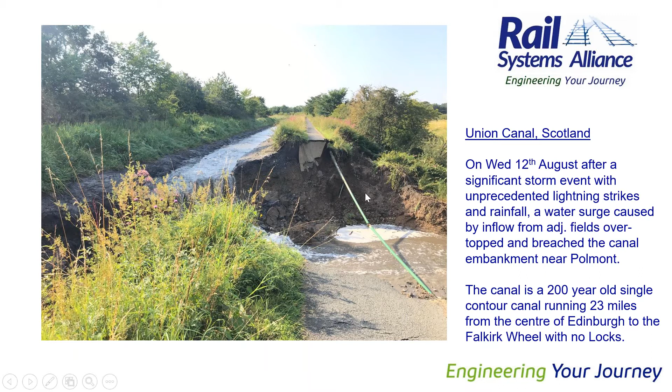Lightning strikes in the Polmont and Whitecross area were significant. Several properties were hit, and there was a significant amount of rain, something like 80 millimeters over 4 or 5 hours, which was subsequently advised to be, I believe, a 1 in 240-year storm, which is obviously a fair return period. The impact it had on the Union Canal was quite drastic, and I'll let, hopefully, Scottish Canals' Director of Infrastructure explain that for us.

Good afternoon. We've had a really challenging day here in Linlithgow. Overnight we saw an incredible amount of rain, up to about 40 millimetres in an hour, hitting this area of the Union Canal. And unfortunately we have seen a breach reported to us about 8 o'clock in the morning, and we were out here within 45 minutes to have a look at it and see what we can do.

We've taken actions across the canal. We've put sandbags at either end of this area of the breach, and we've managed to stop the flow. We are making significant progress, but this is a very challenging situation. The water that is flowing out of here is heading down across a number of fields and down onto the Edinburgh-Glasgow railway, where there is significant damage.

So this has very much been a partnership approach between Transport Scotland, Scottish Canals, Network Rail and the police, and we are dealing with this issue. But I have to say the team have been absolutely fantastic out here, working with our team Mackenzie's. We're getting on top of this situation, but it is going to take us time to get it repaired. It's probably looking at least 3 to 4 months and a considerable amount of investment.

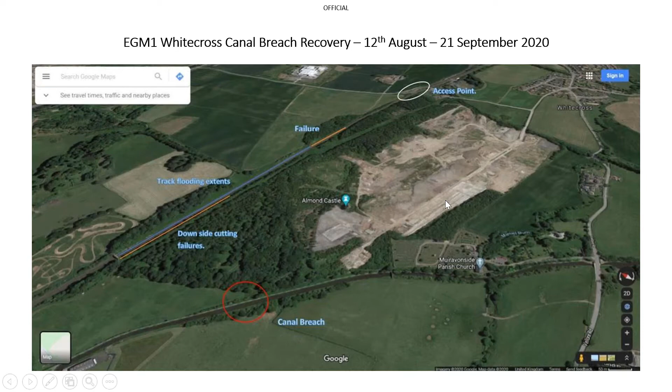So you can see the old brickworks area, which is pretty semi-derelict currently. And then a wooded area which runs between the breach point, heading north down to the main Edinburgh-Glasgow line. And you can see marked on there the kind of extent of the flooding. This is the kind of scale of what happened.

So the canal breach, there was literally thousands of gallons of water swamped into that area I showed, in through the woods that you can see in the back of the photograph, and then there was a sort of berm arrangement and an undulating topography running adjacent to the railway cutting, and as it crossed that, it brought material and significant earth into the railway cutting, along with the massive volume of water. And you can see the impact it had.

As I was talking about with the canal, it basically filled up the railway cutting in that section, which is almost 1 kilometre long, and looked for the weak spot at the end where the cutting changes onto an embankment slope and eroded away from there. So we ended up with a 300-metre long washout, from that transition point.

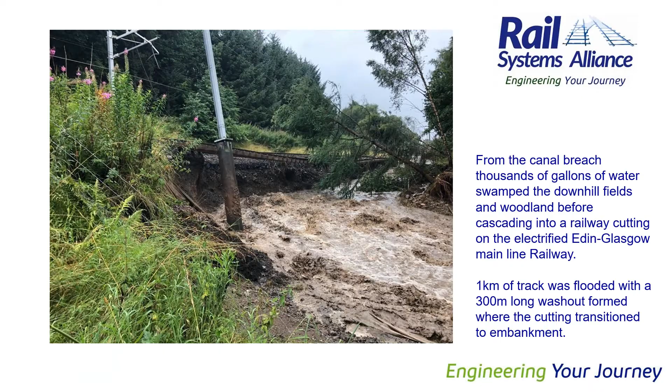So looking at the site, slightly more zoomed in, you've got the sort of triangular wooded area, which reached the main cutting, which basically starts from the main A801 road bridge, which is the Lathallan roundabout to Bathgate road bridge, for those that know the area. And the cutting runs from there for the best part of a kilometre before it goes on to an embankment section on the approach to Bo'ness Junction. And you just see Overbridge 50 there at the bottom of the slide.

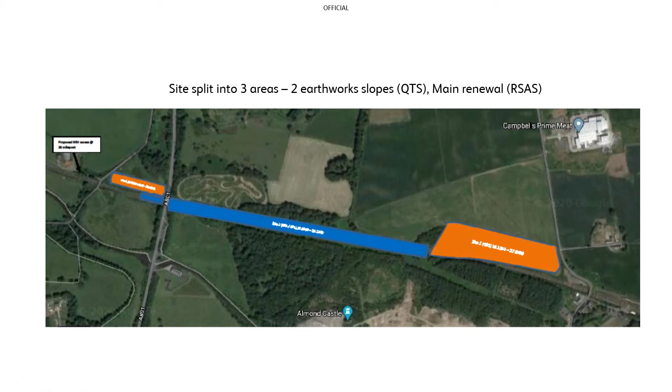Again, some photographs. One of the odd, shall we say, opportunities on site is that you can see these poles. So there was actually some trial slope monitoring systems installed on this particular section of the Edinburgh-Glasgow main line. They didn't actually particularly trigger because the water basically washed across the top of it rather than coming through or undermining those slopes, which had previously been recognised as being fairly mediocre slopes, I guess would be the term.

But that monitoring system has a webcam facility, which is where we had the opportunity to get these photographs. So you can see in the top left photograph, the water coming along and basically had started pouring out in the first photograph into the deep, almost 9 metres high hole that it created, and was gradually working its way back westwards along the edge of the interface between the railway embankment in the distance and the railway cutting where this picture is taken from.

At the other end, this is the other monitoring site. You can just see an accommodation bridge, possibly just cut off in the photograph there, and the level of water. These photographs were taken by mid-afternoon, I think. And you can see the volume of water was obviously significantly less. Once the plug hole had formed at the far end, at the east end of the railway cutting, the water was charging out from the railway, but had caused significant damage on its way.

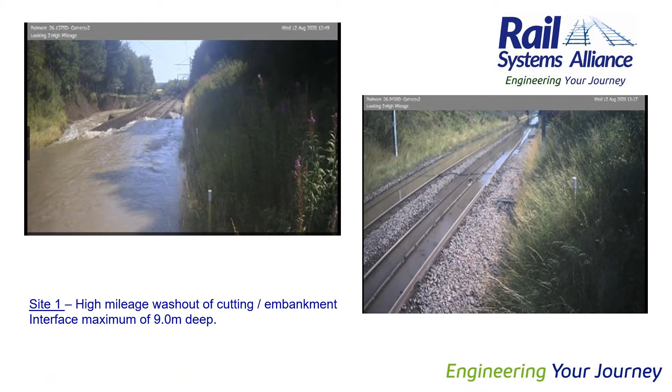The inflow came in over the downline cutting from the adjacent woodland, flooded the area and brought pockets of material primarily onto the downline. The pockets were formed, I think, because of the kind of lateral undulations in the slope along the downline to the south of the tracks.

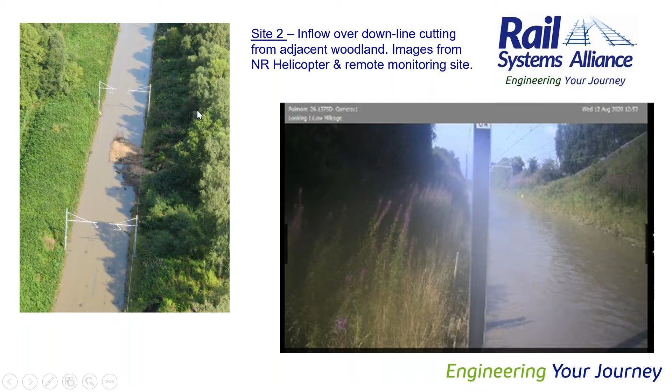A couple more photographs of that, just the kind of material that came in, and demonstration that people were activated, while obviously the canal people spoke about being notified at 8 o'clock in the morning. I think the original notification to Network Rail was somewhere near 5:20 in the morning, when the first train coming through for the start of service notified water coming in and becoming above rail level, which then tripped the track circuits and eventually tripped the overhead line, as you'll see the reason for that shortly.

Looking at the split of site, the previous slide was the centre section, so what I'll refer to as Site 2. The next section is Site 3, so that's along at the main Bathgate Road Bridge, just at the bottom of the slide here. You can see the track photographed from our helicopter, and you can see where the water ingress has eaten itself in underneath the downline. So you can see the exposed sleepers there. And similarly, round about the overhead line masts. So that became another design issue that would need to be picked up.

So moving into a summary at that point, I became allocated and involved in the washout by about late afternoon, 1600 on the 12th. Attended site to meet some of the asset team and representatives from the geotechnical contractor, QTS. They'd been on site, had a look, and they were probably saying they were going to go away and start making arrangements. But definitely when I arrived, they recommended going and having a first-hand look, and just the scale of what had occurred and the sort of wipeout of the railway cutting was quite incredible.

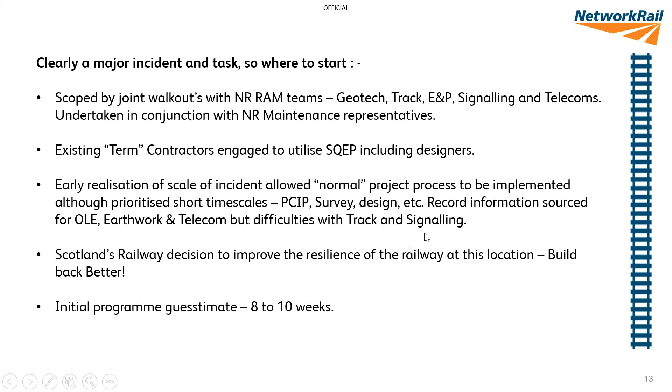So we looked at it and we thought, right, we really need to formalise things, use the correct process, consider what we needed to get in place, safety piece it, get some design information, get the records, make sure that we knew what we were dealing with and properly come together a plan to reinstate. Backed up by that, there was a corporate decision, a Scotland's Railway decision to improve the resilience. Build back better was the phrase that came out and continues to be considered in many ways at the moment. Initial programme guesstimate, 8 to 10 weeks was where we started thinking about it.

So talking about the different sites, site 1, that was the main failure point. This is a helicopter shot looking towards the west. So you can see the water sitting up the top there in the railway cutting. It then came down off the side of the downline and created its own ditch and its own route out of the railway cutting and down the embankment slope, eating in to, as I said before, about 9-metre depth in this area here. So that was termed as being the main slip site, site number 1, and it was 300 or so yards long in real work terms.

QTS were engaged and activated to manage that area. They did a great job setting up site, dealing with all the various apparatus and infrastructure and landowner access. These sites always have farmers that are looking for every penny they can achieve. So the reconstruction work ended up using somewhere on the order of 9,000 tonnes, a combination of 6B rock and 6F5 granular fill material to recreate the embankment itself, and obviously the formation and subbase to the new tracks.

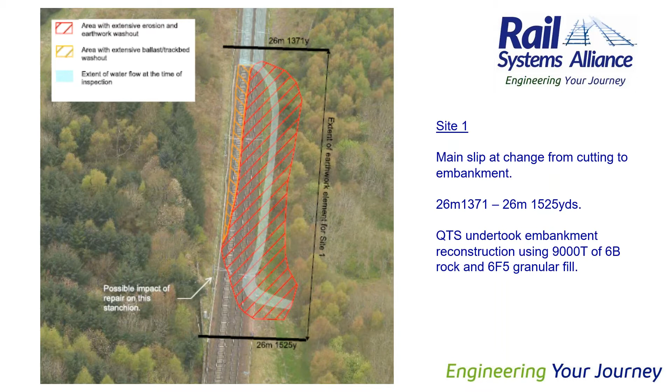This was the detail. COWI are the designers who are on the framework with QTS. So they attended site pretty much round the clock for the initial period and produced recommendations, obviously to do the clearance work initially, get down to a robust material, and then to work with the fill material back up. So you can see the difference in material shown there. That's the 6B rock fill at the bottom, and then the 6F5, and the separation, eventually, on the deepest part of the washout, was between the up and the down roads.

Obviously one of the big concerns is any kind of settlement acting across the sticks, so we did try to put a benching detail in there, but with having drainage and service routes balanced fairly precariously along the edge there, they had to be fairly short. So that certainly was something of an issue later on when we considered reopening and TSR speeds.

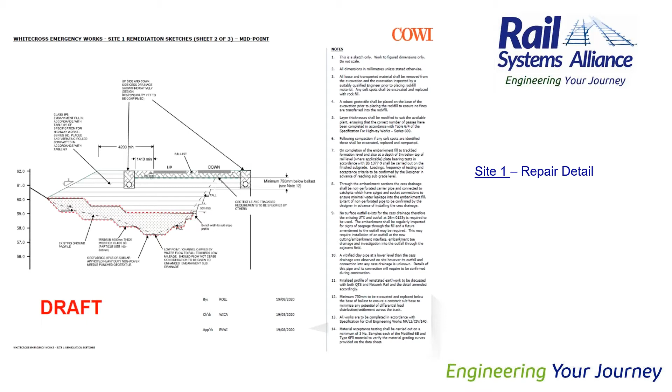At the other end of the works, beyond the Bathgate Road, obviously the scale of work there was significantly less. There was an overhead line mast, which is unfortunately just behind this photograph, which needed to be investigated and then filled round about to create support. And then the embankment was more traditionally benched at roughly 45 degrees to come outside the track support zone. And again, a rock drainage layer was put into the very wet area in the bottom of the adjacent field, and allowed the embankment to be built back strongly enough to support the profile and the cess. As ever, overhead cables, so additional safety concerns adjacent.

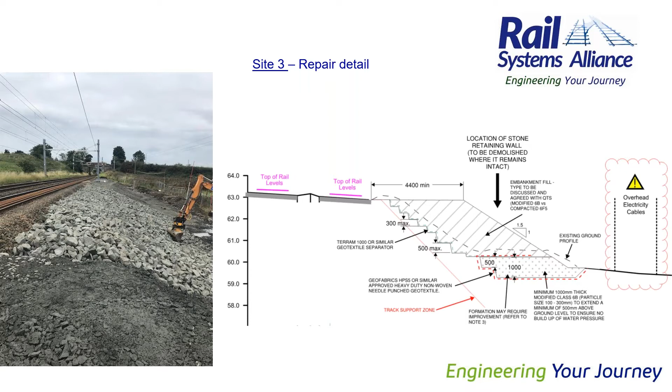So I'll probably move on now, hand over to site 2, which is the centre kilometre or so of the work site, and the main railway reinstatement, which Martin will run us through. Okay, next slide. Here we go.

Yep. So the Rail Systems Alliance got involved quite early on, but this was probably the Monday after the Wednesday that we had our first joint walkout with the asset managers to agree the specifications for the track renewal. The loss adjuster had already agreed that all the areas that had been affected by the flood were to be renewed.

So that cleared a lot of the dubiety whether we try and reuse material or whether we go and just put new material in. The track on the downline, which is on the left-hand side of the photograph, we renewed that 5 years ago along with the drainage in this area. So that was initially thought was, do we try and salvage that and reuse it? And the decision was taken that that would be taken off site and recycled back at Carlisle.

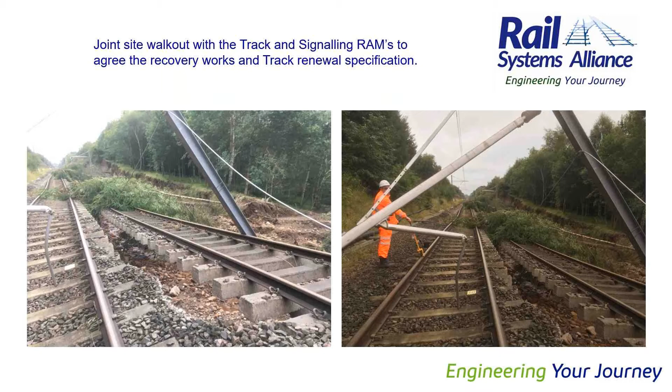Next slide. So this is the on site 1. This is the site compound being constructed. So this was the initial access point. So we had access points at site 1 and site 3, and then we set up another compound at Parliament Yard to access the sites for rail access and storage of material.

The first priority was to get on site 3, the previous photograph that was shown, some of the ballast had been washed out. So the priority was to get that infilled so we could start bringing road rail machines in by the upline, because the upline was less affected than the downline. A lot of the washout had occurred on the downline from the embankment on site 2. So that was the next priority. And then whilst all this was going on,

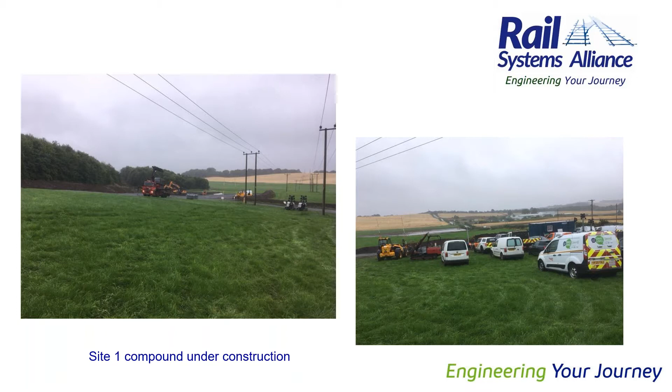you'll see in that photograph there on site 1. What we had to do there was we burnt the rail in either side of that to then allow QTS, it was SPL, to come and remove the overhead line equipment and make that safe. And then the track was chopped up into short 3-meter segments, and we had a machine in the bottom of the hole there lifting out to a road railer that you can just see at the top of the photograph. And that took that area, the 200 meters area of site 1, we stripped all the track out of there to enable QTS to then have a clear site to start doing their recovery works on.

In the meantime, while this was going on, we were surveying and getting an ASC design produced ahead of us starting to do the track recovery works, or track renewal works on site 2.

Next slide. This basically shows a little bit more of the issue we had on site 2. A lot of the embankment on the downcess had probably had previous ballast riddlings from previous reballasting jobs, I think, chucked up on the embankment there, because a lot of that stuff that washed down was sort of ash-like and looked like former ballast riddlings. So all that had to be cleared away.

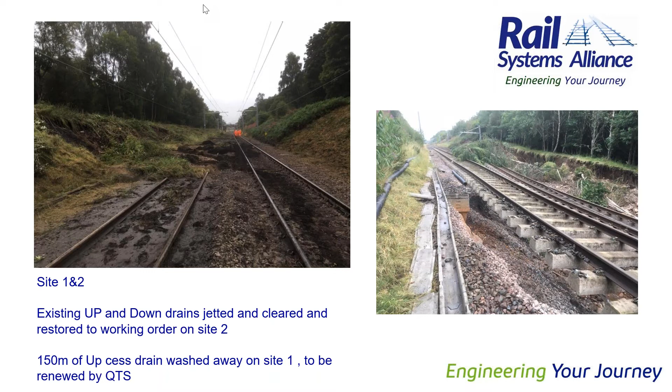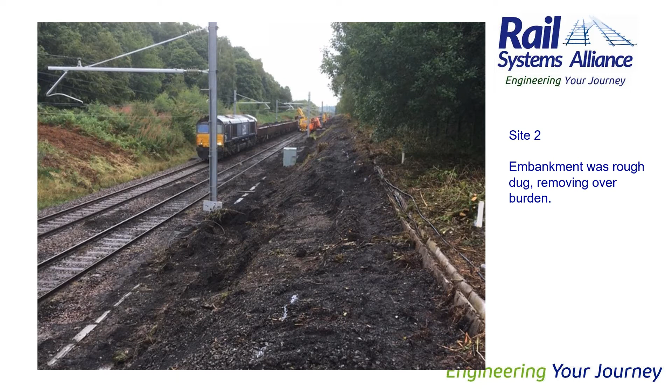So this is a little bit further on now. So the embankment's now being graded off, and we're now preparing to do the actual track renewal on the downline. So that's just mentioning the rough digging there. So that's about 4,000 tons of material was removed. Next slide.

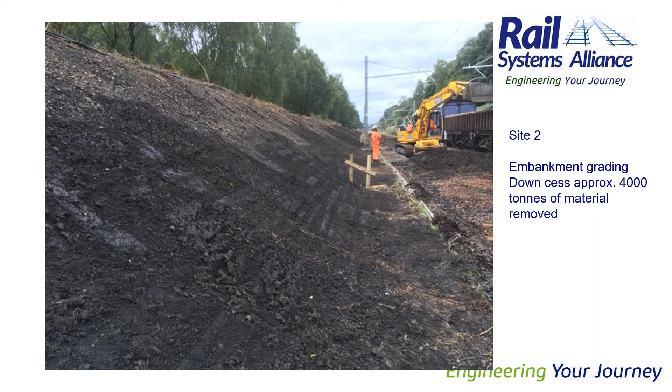So this is just looking back at site 1 again. So you can see now that the infill is going great there now. So you're probably down to about 2 meters now. So they've already put over 7 meters of material in there, and that was allowing us to continue on with the recovery of the upline then on site 2. Next slide.

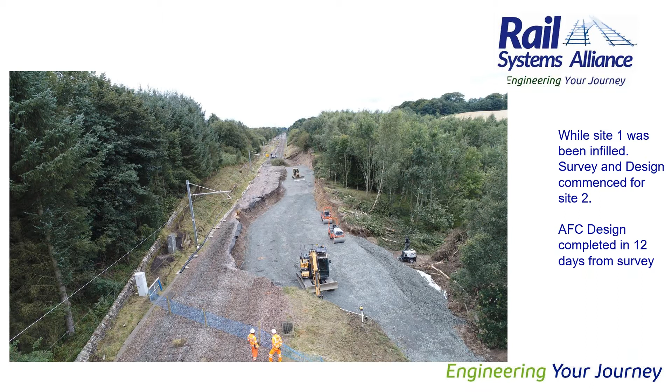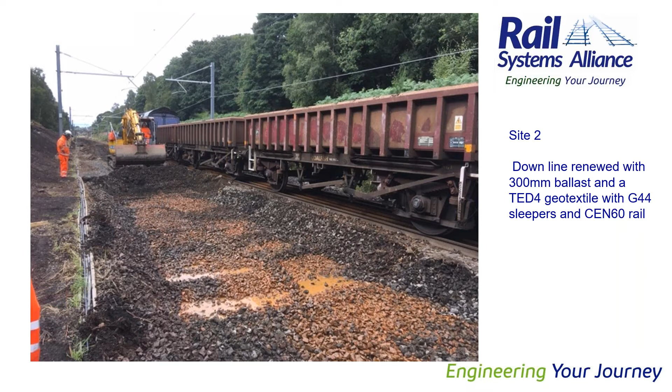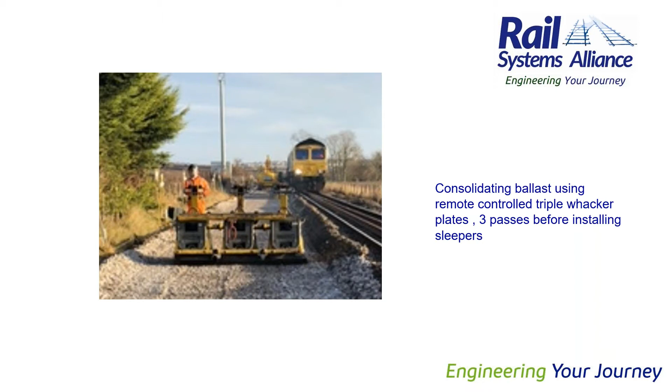So we'd agreed at the start that we were initially going to open at a 15 mile an hour handback speed. So we worked on the basis we're going to do 3 passes with the whacker plates, because there was a bit of debate whether we're going to go for a higher speed handback or not, but we'll come back to that later in the presentation. But at this early on, we had agreed that it was going to be a 15, so that's what we designed and did the consolidation for. Next slide.

This is commencing now of the relay in the sleepers. So this is using the spider handling system. So this takes out 7 sleepers at a time, and the handling tool, or spider as it's called, spaces your sleepers and drops them in position. So you can see that there's a white spray paint marker on the left-hand photograph. That's so the operator can then line up the sleepers. It places them in position for relaying. Next slide.

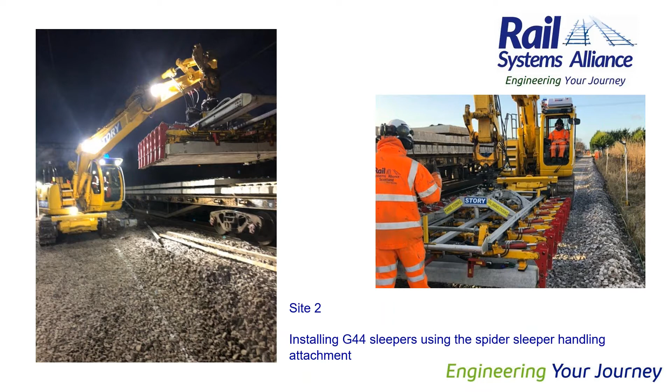So this is now looking at site 2. We're getting very close now to getting to the final formation level. We'd agreed with QTS that they were going to profile the sub base with a correct crossfall for us. So all we would have to do was relay our geotextile on it and ballast up. And they were also going to install the track drainage, but there was about 150 meters missing at that location as well. The next slide.

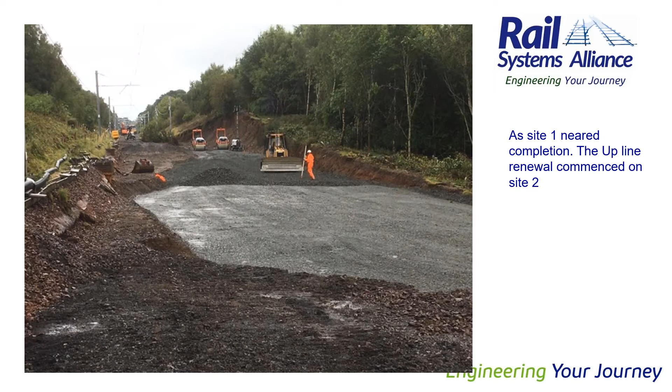So this is now the formation ready. QTS have just completed their works, and now this is just us preparing to start relaying on the downline, the upline, to try and join the 2 sections of railway together, and then we're going to relay from the downline from the upline. So the next slide.

This is a new bit of kit that we'd only just started using. This was the second time we'd used it, and the first time we'd ever used it for dropping ballast. These are the MFS wagons, sorry. It was originally bought for a high output relaying system, and as a result of the cutbacks, there was surplus wagons available. So these wagons are now available for use for normal track renewals rather than high output track renewals. And 2 of these wagons were converted into track machines.

Initially, they were designed for S&C, and the intention was that they could be used for both excavating and bringing material to site where you've taken all the track out, so you don't normally have any other means to relay from one road to the other. We used it very successfully for excavating on the site at Devil's Bridge in between Inverness and Dingwall about 2 weeks before this photograph was taken, and that was the first time we'd used them. But on that location, we were using them to load into and transfer the material into the train, rather than, in this case, we were using them to offload.

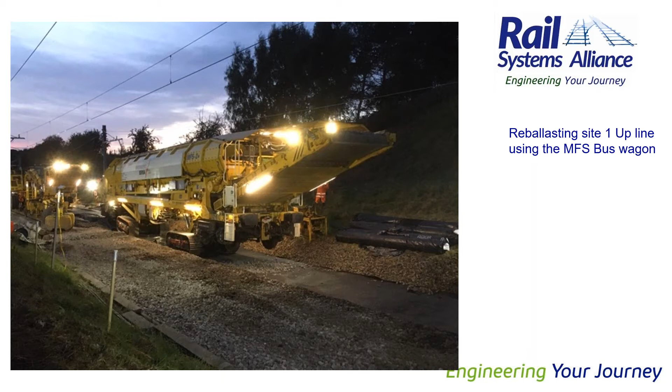Okay, Martin, just to say I've got that video ready on the next slide if you're good to go with that. Yeah, so this is the video of this machine working now. It's quite loud, so I'll probably just let you watch the video and maybe be prepared to tune your volumes down. Yeah. Assuming it works, of course.

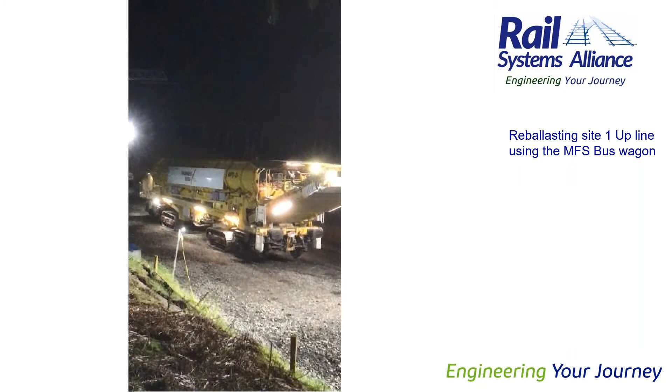Right. Yes. Okay, Martin. So, yep.

Yeah. So you see there the photographs of offloading the ballast there. Now I should say there were 2 wagons that have got tracked machines. There was one, you may have seen it in the corner of the photograph, that was just at the end of the last shot.

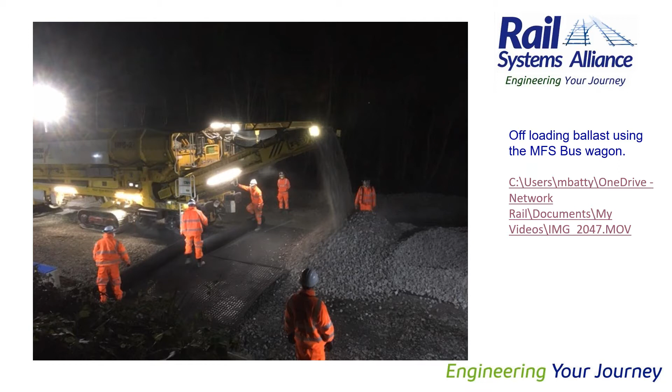Unfortunately, one of the wagons we were unable to get to work. It physically was able to move around, but we just couldn't get it to offload the ballast. It was showing a systems fault on it. Unfortunately, you'll see later on that there's another story to go with that. So I'll just go on to the next slide now.

So we had 3 separate design teams, all working under separate contracts, but everybody worked together, and it was a fantastic collaborative working, and it was a real good example of what people can do when it really matters. So we'll go on to the next slide.

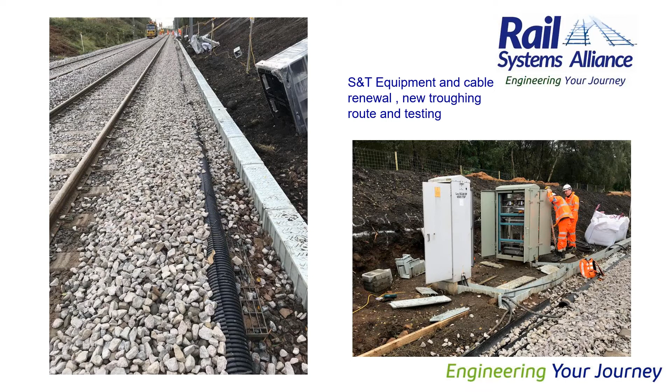As well as the track works, there was quite a significant amount of S&T work to be done, apart from just new cabling routes and new cabling. Location boxes all had to be renewed because they'd been under floodwater up to about 1 metre height. So all that equipment had to be replaced, renewed and tested prior to the work being completed. Next slide.

Okay, I think I'll step back in. Thank you very much, Martin.

At that stage, we were working to a completion date of the 28th of September. They challenged us to push ahead and see what we could do to improve that, and we were basically pushed into doing the 21st of September. The consequence of that, as you've seen from the photographs, a lot of the heavy civils had progressed well. Obviously, the track renewal had gone in, but it did cause issues with the logic that we started off on, particularly relating to the signalling equipment, about trying to build back better.

Making decisions to renew cables and renew boxes, where a normal emergency response would just be to use maintenance perspectives and put things back together as quickly as possible, was a little undermined at that stage, and it meant that there was ongoing rules of route work following the entry into service of the reinstated railway. So that was a political and a corporate decision at that point to bring things forward.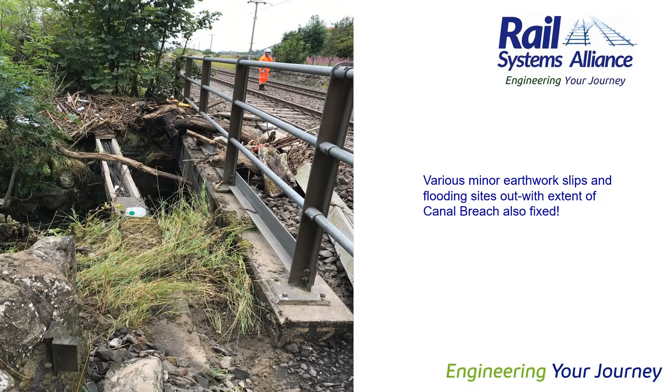So running back to a previous slide and updating it, in summary, how were the works scoped and designed, particularly addressing hazards and improving the resilience. So as I said before, joint walkouts, using the existing term contractors and the qualified and experienced people to do the works. An early realization of the scale, making sure that we carried everything out with all the right records.

As Martin talked about in one of his slides, design work was properly surveyed and fully carried out, you know, in a time scale of a few days. And I think we ended up with a signed off permanent way Form B 6 or 12 hours in advance of it actually being implemented on the ground. So, you know, things were certainly done very promptly.

Looking back, one of the key early PM decisions, I think, in consultation with our health, safety, quality and environmental team, was to split the site into 3. It gave the 2 principal contractors, QTS and the Rail Systems Alliance, the opportunity to be geographically separated. And then that allowed our CDM responsibilities to be met by those 2 principal contractors.

Building back better, the resilience, so we improved the earthwork robustness.

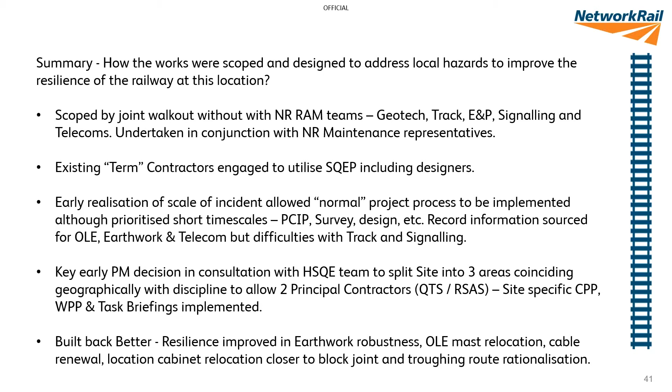Hazard management, obviously the track condition for plant access, so we had to make sure that we checked the plant on the way up from the access points, particularly from Polmont Yard. The earthwork condition underneath, making sure that we had an understanding of what damage the water may or may not have done in softening up the formation. What was going on in the adjacent ground, whether or not there was going to be more water. So we had quite a lot of liaison with Scottish Canals, making sure that their temporary dams were robust enough to control any further risk from there.

Condition of cables, obviously, as ever, telecoms cables, for example, can have an impact on station announcements or signalling systems many miles from any particular location. So we still had to treat a lot of the cables as live, even though we knew they had been disconnected locally. You do that to ensure that you avoid impacting the operational railway outwith the extents of the site.

Something came up. There was a request to run an electric service into Linlithgow from Edinburgh, while obviously the Linlithgow to Polmont section was still blocked by the works. But the feed system for the overhead line came from towards Greenhill feeder station, and it could be resupplied from over on the Bathgate branch, but that was a little more technically problematic than expected, and took up a fair bit of involvement from both Network Rail asset teams and some assistance from SPL and the Network Rail Capital Delivery project teams.

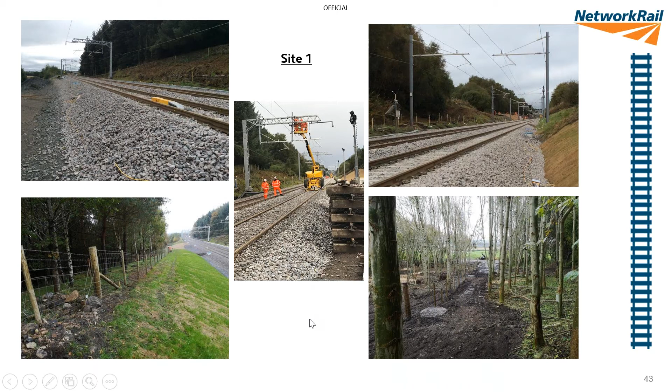Down at Site 3, you can see all that graded out and rock fill to create an embankment and replace the affected area around the overhead line mast, and new fencing, and returning the field back to the landowner. One of the things that we were looking at picking up, I think Martin mentioned it, but in the permanent way design, the overbridge that you can see in the distance was actually tight clearance, electrical clearance wise. So the design was able to achieve an additional 100 mil there, which has allowed for the removal of the tamping restriction through that particular stretch.

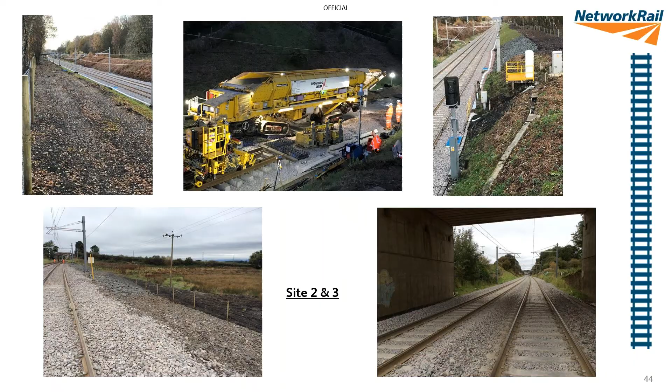I'll try my luck with a couple of videos. So we ended up with test trains on the evening of Sunday the 20th of September. As you can see in that footage, it's a little darker. And then a handback on Monday the 21st for opening of service. As Martin referred to, handback speed, we eventually agreed on 60 miles an hour. There was quite a lot of challenge to the initial figures.

The embankment designers were keen to go with 40 mile an hour initially, and obviously the Rail Systems Alliance Scotland are capable of opening back up to a much higher line speed, 80 or 90 miles an hour. But in this scenario, because of the risk of settlement of a 9 meter deep localized embankment, particularly on a cross track stepped detail, after a bit of consideration and consulting various other experienced engineers around the country, we agreed on a fairly significant monitoring arrangement and a handback speed of 60 mile an hour, which, looking back at the monitoring results, certainly we were comfortable with.

The monitoring results were pretty consistent. There was some global settlement, but there was very little twist fault created. So it's good from that perspective. I'll just try and run these couple of videos. This is the first train on the down line.